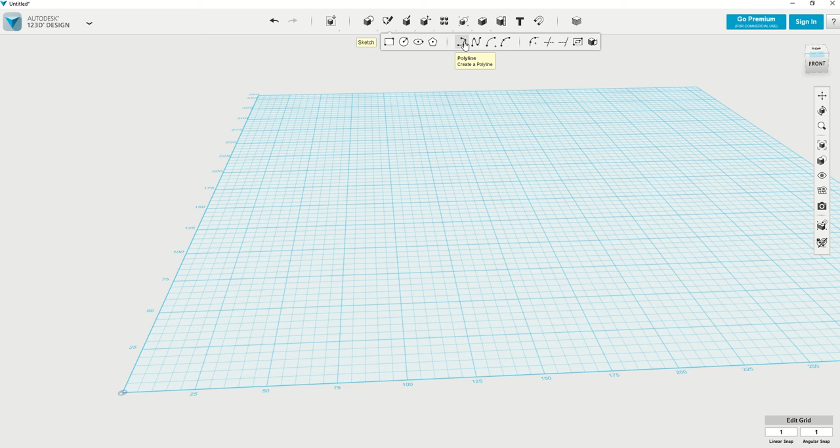In this video we're going to learn how to use some sketch tools. So we will be learning first of all something called a polyline. So if you go up to Sketch up here and then you go over to Polyline, the first thing you'll see is it says click on grid, sketch, or solid face to start sketching.

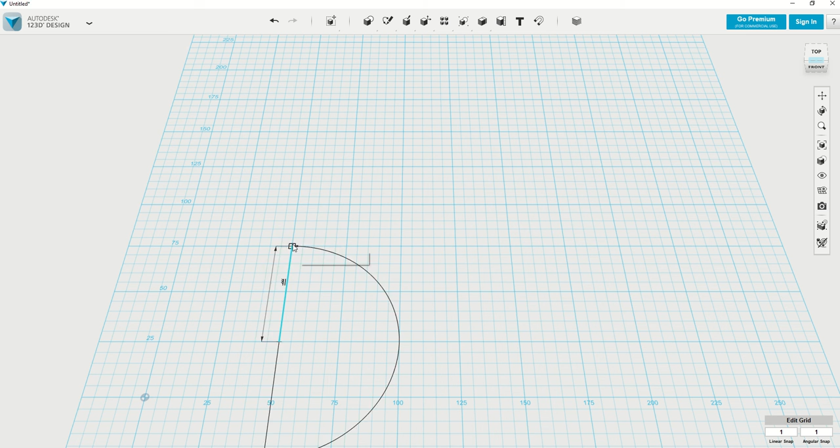So you have to click once, and I'm going to be sketching on the work plane, so I've clicked on that. Then it says click to specify my first point. So it doesn't really matter where you start, I would just choose a point. So you can sketch any shape you want, and you just keep clicking and drawing to create a shape

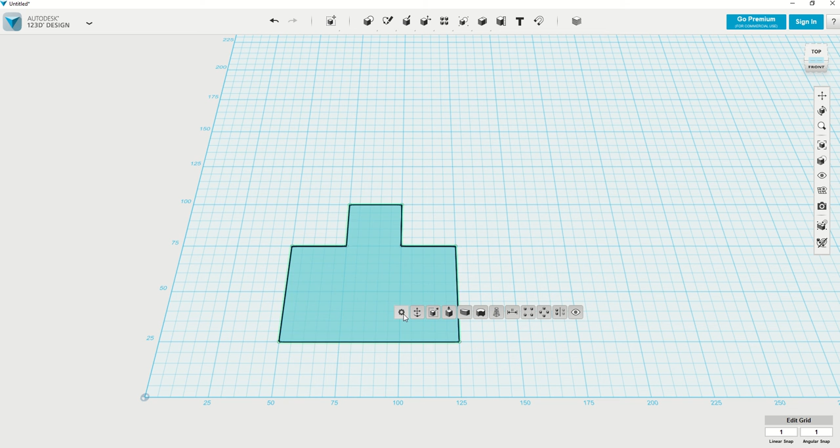that you like. Now as soon as I go back to my starting point, you'll notice something happened. It turned light blue. So at that point, if that's the sketch that I wanted, I would click enter on my keyboard, and then it's now finished that sketch. And again, you'll notice it's light blue, and when I hover over it and I actually click on it, this little wheel pops up. So when that wheel pops up, now we can do things to this sketch.

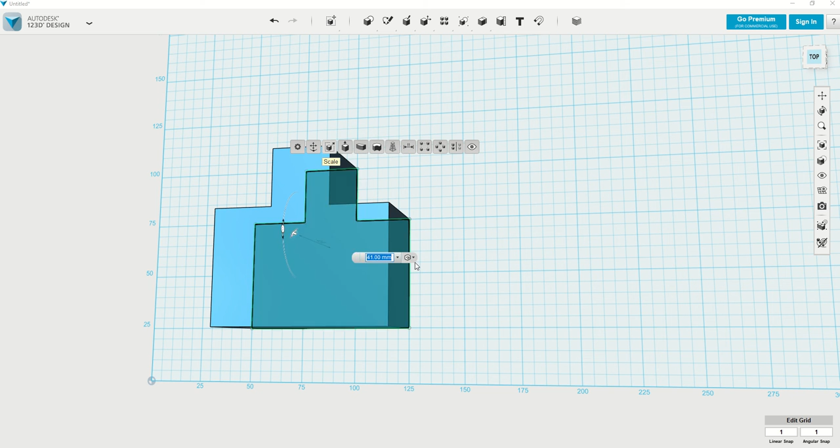So the most important one that we will use quite a bit is called extrude. So what we'll be doing is we'll be extruding this shape upwards. So we've started with a two-dimensional sketch, and now we've created a three-dimensional shape. And you'll be doing a lot of that in 123D, so that's something you'll get very, very used to. So that is something called a polyline. And as soon as I push enter, now I've got a three-dimensional shape that I can look at and pan around and see.

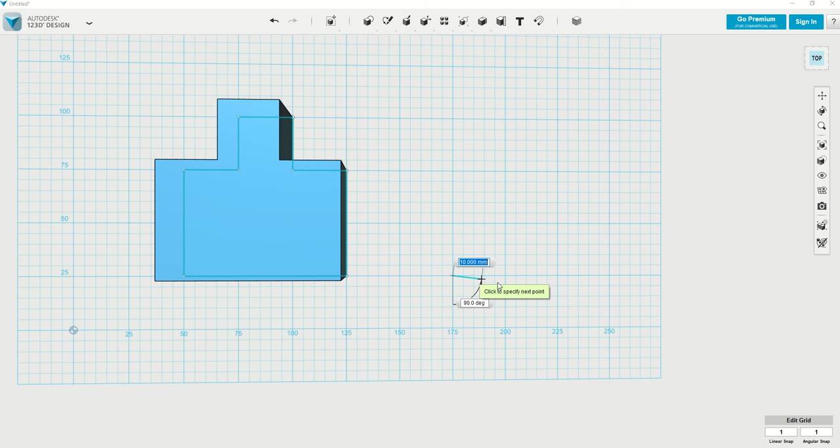A polyline is the most common line that we're going to use because it's very precise. When we go to polyline and I wanted to create another one, I'll go back on the work plane. I'll slow it down a little bit, and you'll notice that it says 10 millimeters and 90 degrees. If I were to move that, you can see that it changes. Now it's 25.495 at a different degree. So these ones are really precise.

Also notice that it automatically snaps to every 5 millimeters. If I'm in between that, it goes to the thousandth of a millimeter, which is kind of difficult to do. So if I have a line that's 15 millimeters, that's great. That's really easy to do. If my next line needed to be 12, well, it's quite hard to be precise.

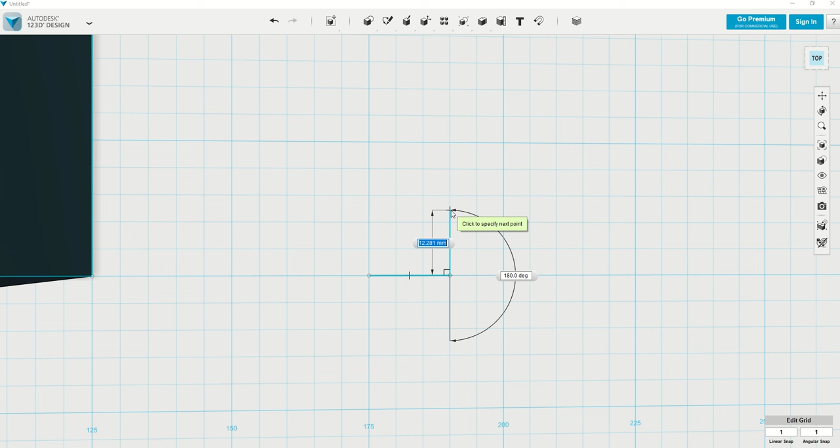Except what we can do is notice that 12.281 is highlighted in blue. If I just type the numbers 12 and then push enter, it now locks it in. If I push enter again 2 more times, it has now created that line. So I've got a 12 millimeter line there. So I'll show you that process again.

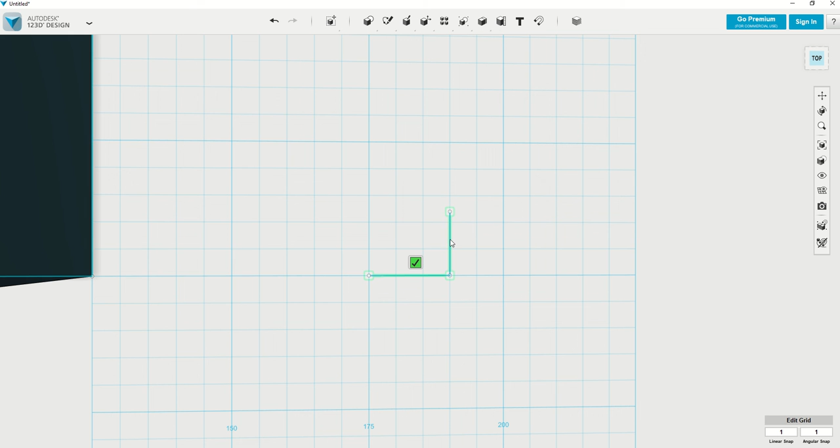If I do need to edit this sketch or add more to it, I have to make sure I actually click on the sketch, and then I choose my point to start from. I'm going to choose there. Let's say I wanted to go over 32. I have to type in 32. I can push enter. The other thing I can do is then I can just click, and then click the check mark when you're finished. So now I've created a simple sketch.

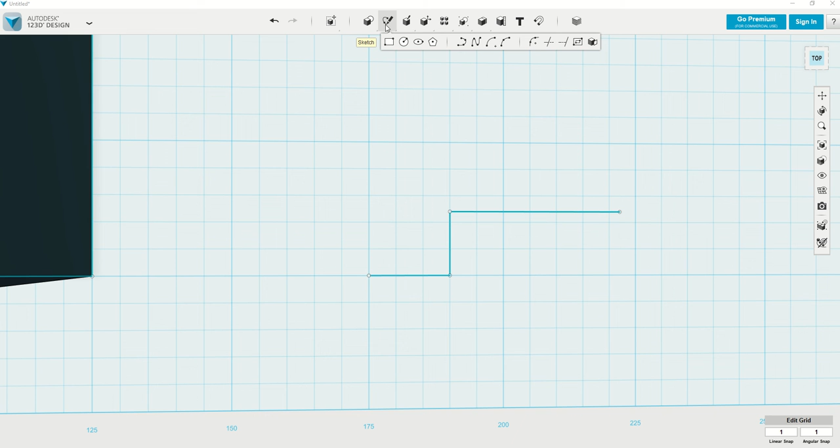What you will notice though is if you were trying to extrude this and make this three-dimensional, there's no way to do that. You actually have to close this sketch in, so I'd actually have to add some more sketches to it. So I edit my original sketch, click to start it, and I have to go back to the original starting point. Click on exit, and now it's got a closed sketch, and you'll know that because it highlights it in a slightly different color. So I could then click on that and extrude.

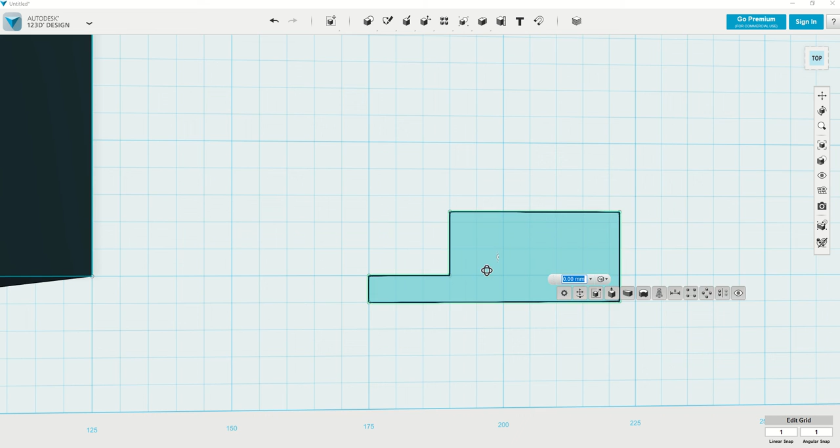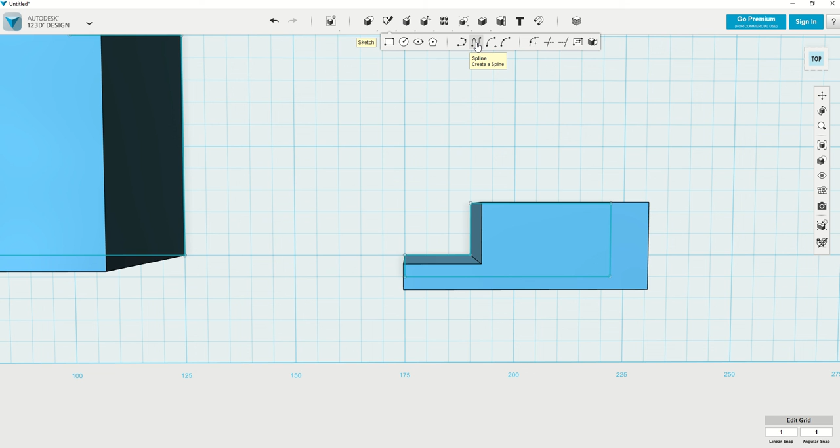So if I orbit so I can see that arrow a little bit better and you start pulling it out, notice you can be very precise at how much you want to pull it out. So I could pull it out 25.75 millimeters if I wanted to, and then push enter. And then now I've got a three-dimensional shape. So that is called a polyline. In the next video I'll show you something called a spline. It's a little bit less precise, but you can do a lot more interesting things with it.